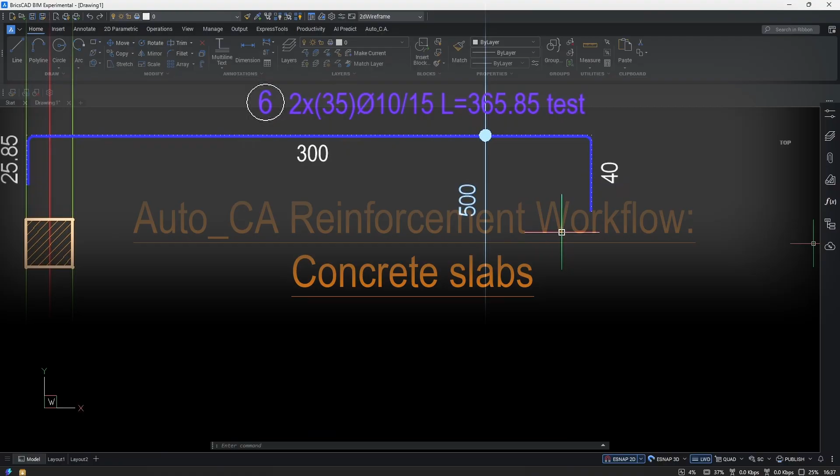Welcome! In this video, we'll provide an overview of AutoCA, our CAD software solution designed to simplify technical drafting and improve productivity. Together, we'll explore the main features of the software and see how it can support your daily design and drafting activities. So, let's get started.

Once the AutoCA installation is complete, activate the software by typing +AutoCA into the CAD command line. After running the command, the AutoCA menu will appear at the top of the CAD interface, as you saw. Open the menu and select Control Panel.

The first time you launch the software, a login window will appear where you'll need to enter your username, password, and activation code. After the initial activation, these credentials are stored automatically, so you won't need to enter them again.

If you prefer not to see the login window in the future, simply disable the corresponding option in the General parameters under the Show Login dialog. Uncheck this box and you're good to go. Don't forget to also click on the Save Environment button. Now, the control panel can be opened using this button. This panel contains the general settings used throughout the software.

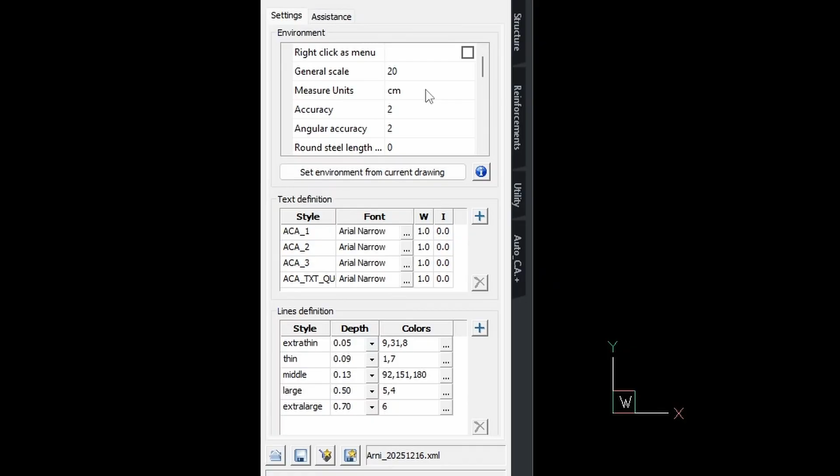The first setting allows you to define the unit of measurement. It's important to select the same unit that is used in the drawing or formwork model you are working with. For example, if your drawing is created in meters, then select meter. If it is created in centimeters, like in my case, you should also select centimeter here, and so on. Maintaining consistency ensures that all reinforcement elements are generated correctly.

Next, we find the font settings grid. These predefined styles cannot be deleted, although additional styles can be created if needed. For that, you just need to click on this plus button that says adding a new style. The default styles, though, will always remain available.

The selected styles are automatically assigned to the various objects created within the software. By modifying a style, all related objects immediately adopt the new graphical standard, including the text appearance, graphics, colors, and other visual properties. This allows you to quickly adapt the entire drawing environment to your company's standards.

The final grid allows you to define the colors used within the drawing. These colors should be configured according to the CTB file used for printing. AutoCA works with 5 predefined line weights, ranging from the thinnest to the thickest pen weight. Each category can be associated with one or more AutoCAD colors.

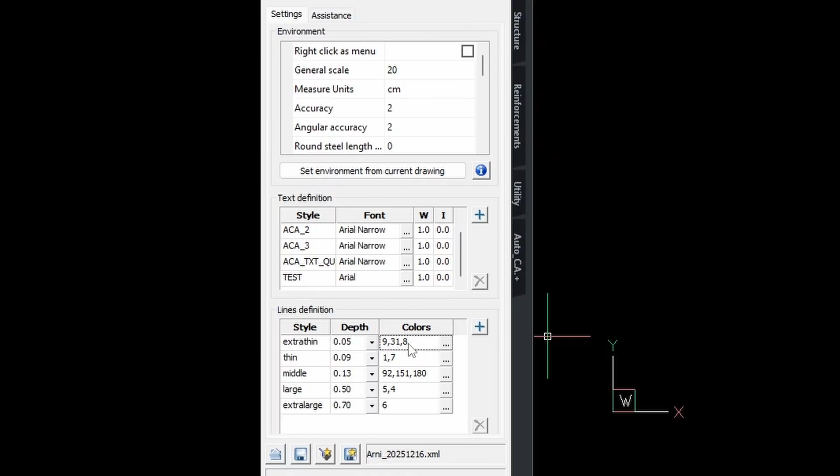Colors can either be entered manually by typing the color number separated by commas, or selected from the standard color picker. For example, if black is assigned to the thinnest pen weight, all colors listed in that category will print as black, but with the corresponding line thickness defined in the CTB file.

One important rule is that the same color cannot be assigned to more than one line weight category. If a color needs to be moved to another category, it must first be removed from its current location. Otherwise, the dialog will not allow the configuration to be saved, since a CTB file can associate a color with only one line weight.

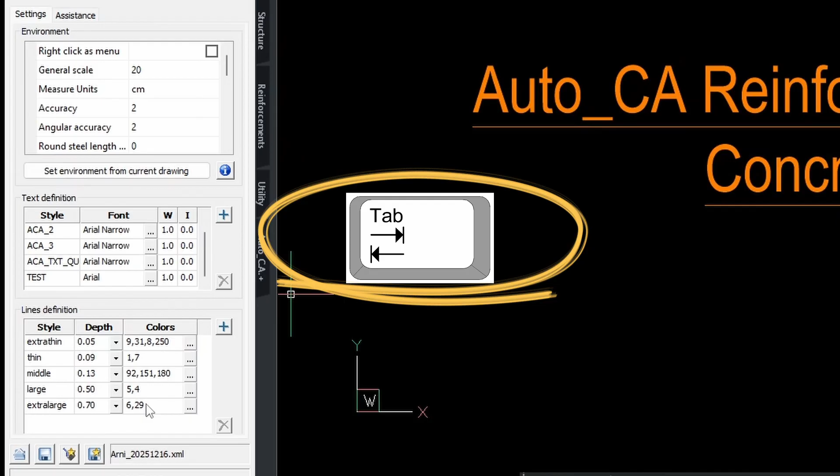Also, when entering values in a field, simply typing the number is not enough. You must confirm the value by pressing the Tab key or clicking into another field. Otherwise, the change will not be registered. This behavior is consistent throughout the software and applies to all AutoCA dialogues.

And now we arrive at one of the most important sections of this panel. At the bottom of the window, we find the controls used to manage working environments. A working environment contains much more than the settings displayed in this dialog. It stores the configuration of all AutoCA dialogues and tools, whether you are creating meshes, bar series, reinforcement bars, or other objects. Each tool contains customization settings that define appearance, colors, layers, and in some cases, calculation parameters.

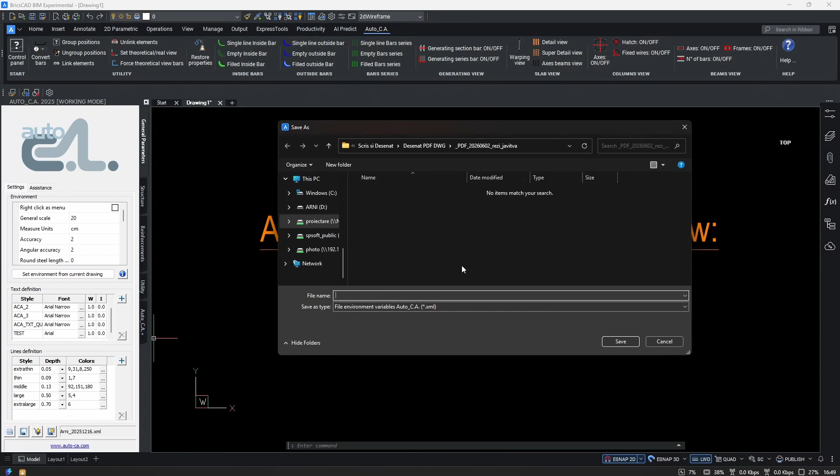All these settings are stored together within a working environment profile. By default, this profile is named AutoCA. We strongly recommend that every user creates a personalized working environment. If modifications are made while using the default AutoCA profile, future software updates may override the file and reset all custom settings. For this reason, it is good practice to immediately create a profile with your own name, your company name, or a project-specific name.

Working environment files can also be shared across a network. This allows you to work with exactly the same standards and settings, ensuring consistency across an entire project team. The Save Environment as Default button stores the current environment in the local computer registry. This ensures that every time the software is launched, the same settings are loaded automatically. If the environment is not saved as default, any changes made during the session will be lost when both AutoCA and the CAD application are closed.

The environment can also be saved to an external file. For example, we can save a profile named test to the desktop. Later, we can reload that file whenever needed and immediately know which configuration is currently active. This provides a simple and reliable way to manage different standards, projects, or client-specific configurations.

Now we're going to look at one of the most common reinforcement workflows in AutoCA: creating, modifying, copying and managing distributed reinforcement bars, and finally generating the corresponding bar schedules and tables. Let's start with something very simple.

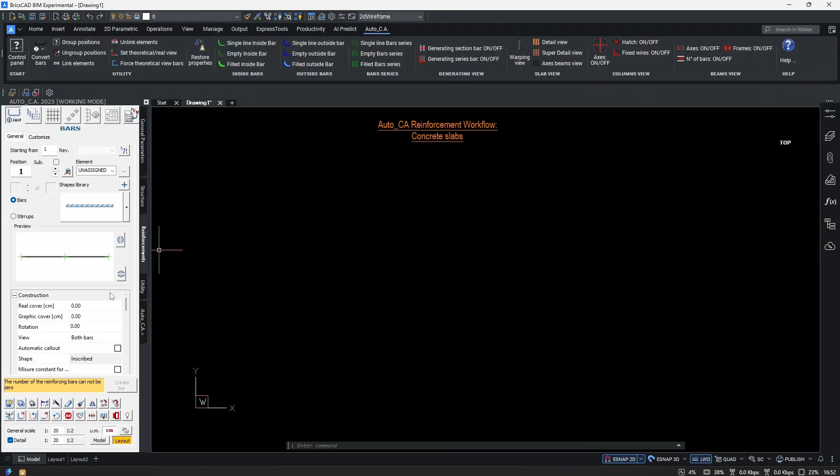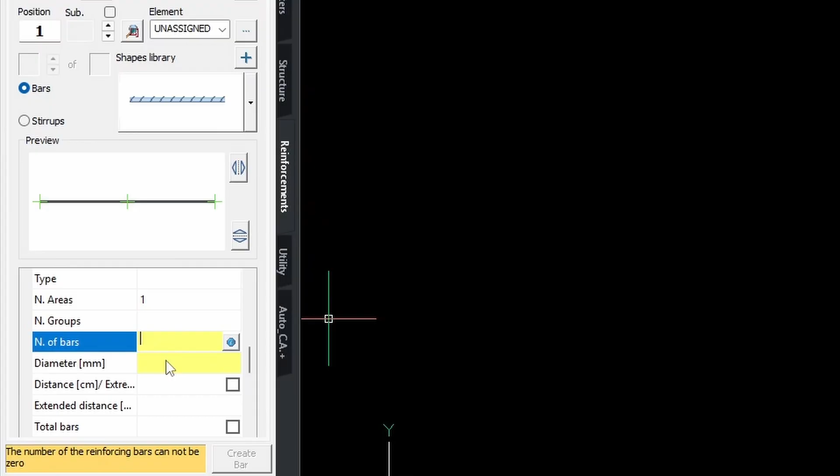First, I'll create a basic reinforcement bar and place it onto the drawing. For that, you will need to specify the length, which initially is 300 centimeters. And also you will have to fill all the other yellow tinted text boxes, because the software won't allow you to create anything unless all the yellow brackets are filled. So number of bars is gonna be 1 for now, and diameter is gonna be 12.

That's in millimeters. Right now, the Create Bar button is live, and I can click on it, and also I can place that bar I just created. One single bar with 12 millimeters in diameter and 300 centimeters in length. Once it's created, I'll make a few copies of it.

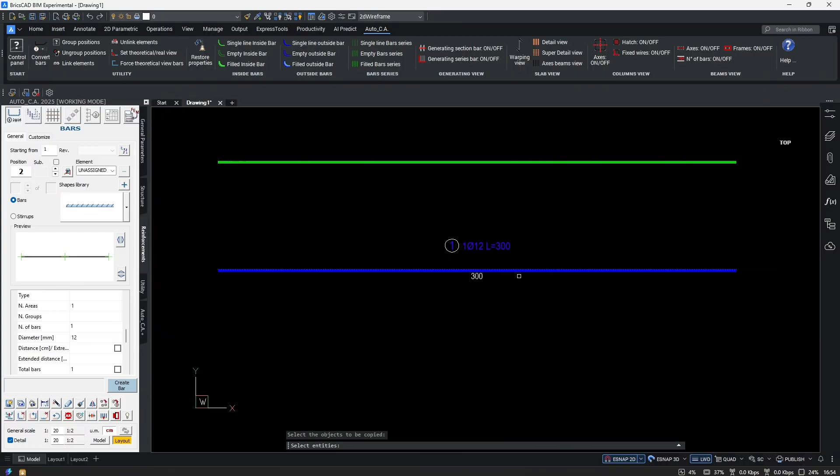For copying Auto C.A. elements, you will need to use the copy elements proprietary command. Keep in mind, this is not the same as the standard CAD copy, so it's proprietary. Notice how the bar numbering continues automatically. Every new bar receives the next available mark number without any manual intervention. 1, 2, 3, 4, 5.

Okay, before moving on, let's also generate a quick bar table using the all bars in drawing option so we can see how the software is already tracking our reinforcement information. As you can see, here we have all 5 bars.

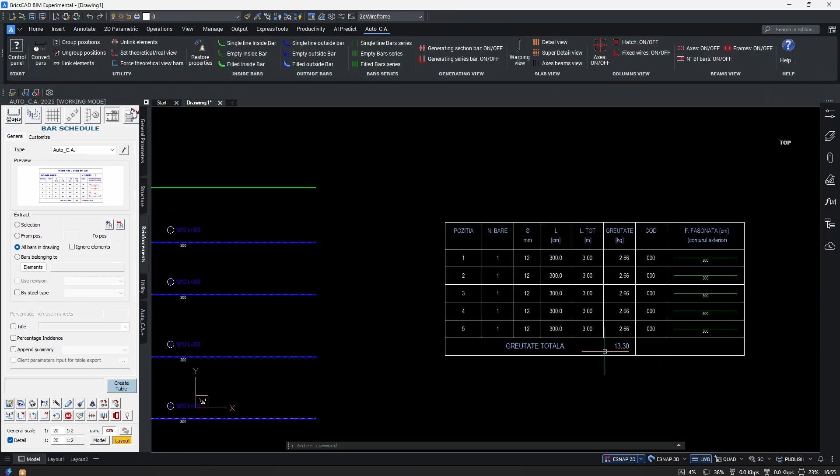Now, let's switch to a clean formwork drawing and start a more realistic example. We'll create a simple distributed reinforcement bar arrangement from scratch. And now, as we go through the definition process, I'll explain every option available in the dialog. So, as we talked about earlier, we need to fill all the yellow text boxes to be able to create anything. So, I will enter as a number of bars a 1 and for diameter a 10.

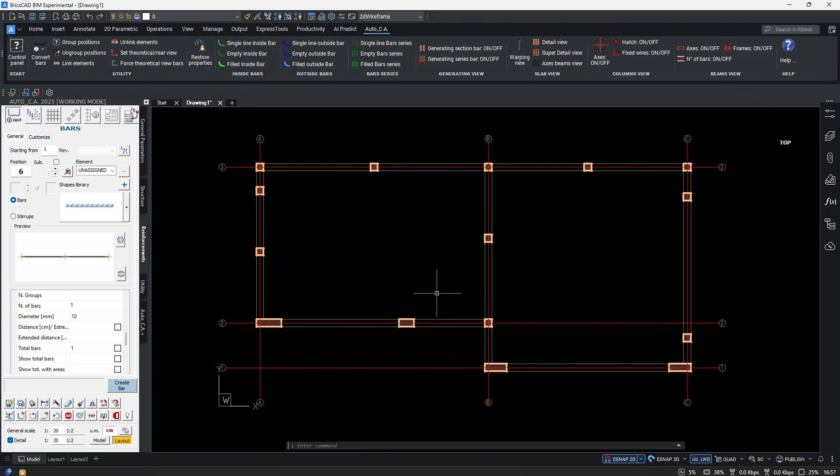But right now I want to distribute these bars along this slab, so we will need to also insert a distance between every bar and an extended distance, which will be the full distribution distance. For that, I will use this button, which is the graphic extension. I will define this length, which is 5 meters, and this is exactly what's entered here in the text box.

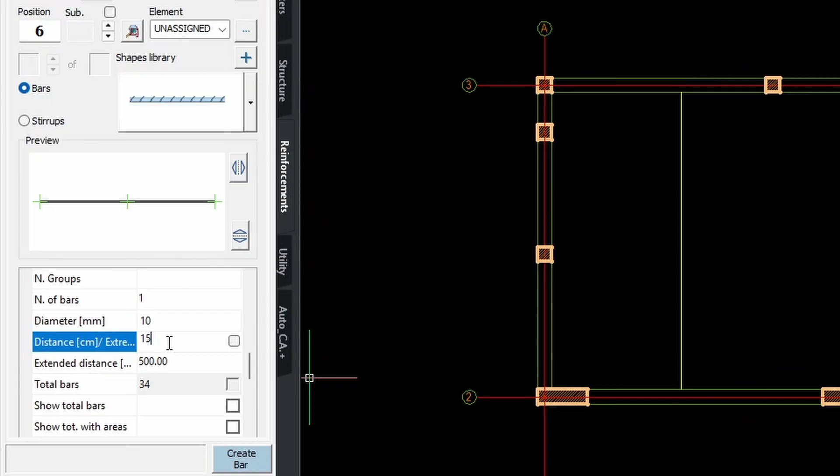And together with the 15 centimeter distribution distance, it's already calculated that we have 34 bars. Okay, let's put this bar onto the drawing. I want only the outside bar, and let's put it over here.

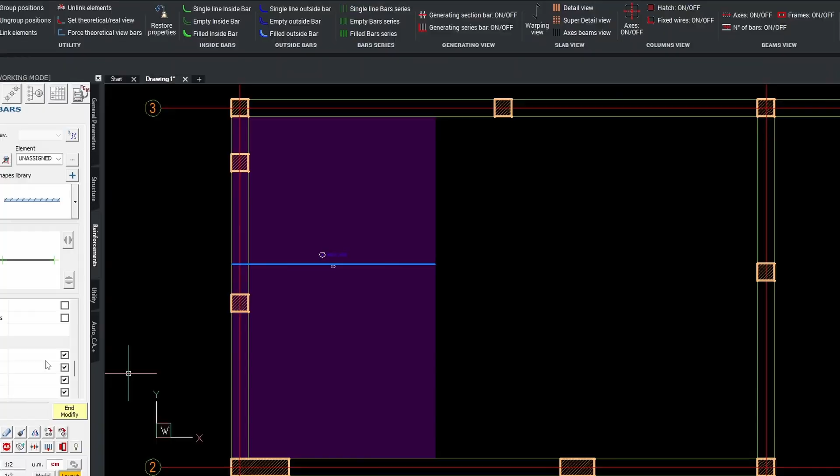One thing worth mentioning is that in practice, most users rarely create complete bar definitions from scratch. Once you understand the logic, you might only perform a full definition a handful of times. After that, most reinforcement is created simply by copying and adapting existing bars.

So we need the graphic extension shown, and right now we have the little blue arrow representing the distribution distance, the full distance. Now there are some other features that you might need to know of. Let's go into the bar properties, modify bar, and at the distance between the bars, we have another checkbox. And if you hover your mouse over here, it shows extremes required.

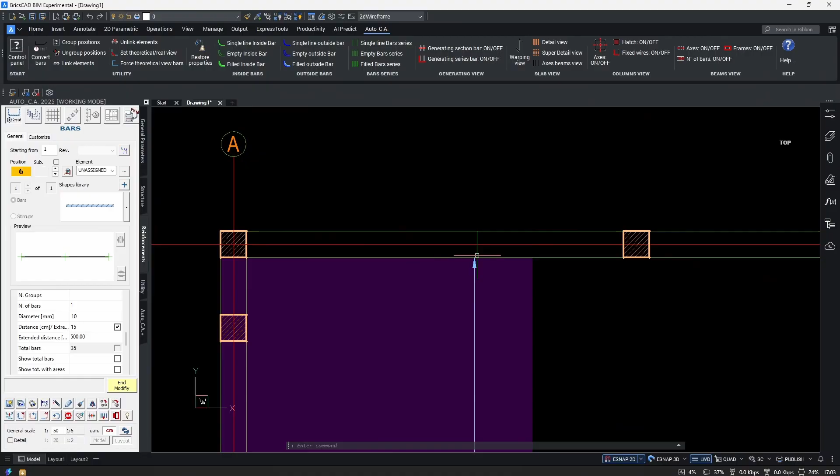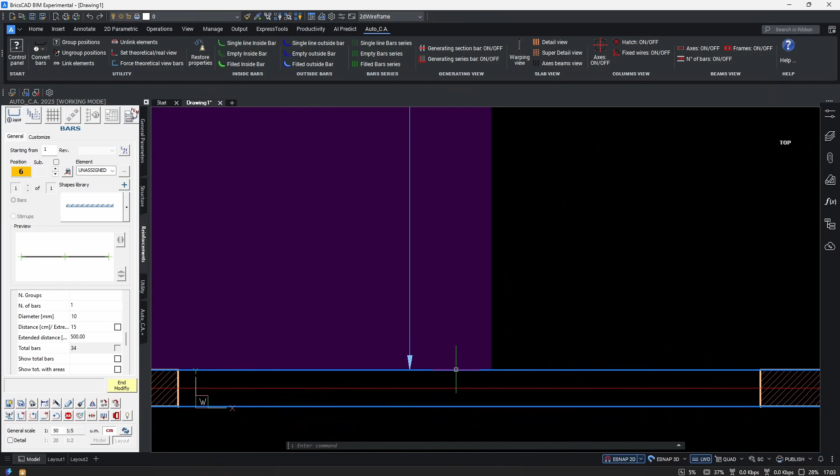These extremes mean that if you check this box, then you will have another bar in plus, because the distribution will start and end with 1 bar. And if you uncheck this, the last bar will disappear in theory, because we are not forcing the distribution to have a bar on both ends. So if you want to force it, you can, and you will have a bar in plus. But if you don't need that, you just uncheck this box.

And after that, we have several other checkboxes down under the visualization menu, and let's walk through them. The real view means that you will have the exact thickness as it is mentioned in the text here. So what you define in the diameter, that exact thickness you will get if you check this real view. If not, you will only get a simple line.

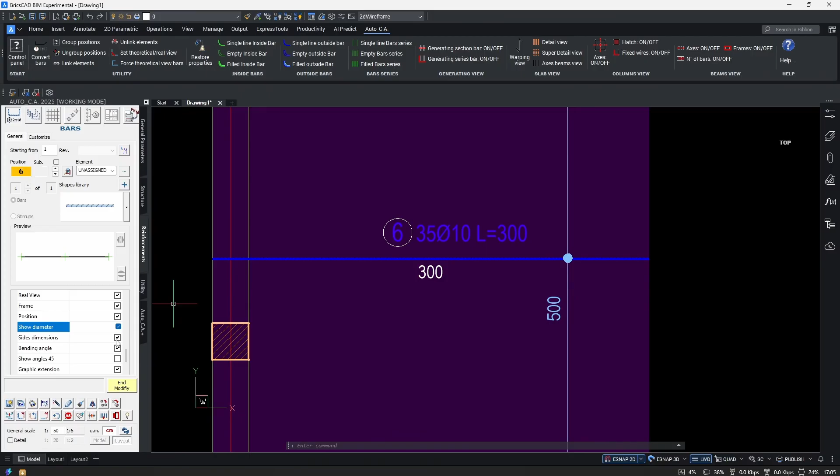The frame is the frame around the mark number. You can enable and disable that. The position is the full mark, hidden or shown. The show diameter is the diameter parameter in the label of the bar. Sides dimension, this is the smaller number indicating all the sides.

Bending angle, we also have that one. If we had another side, we could see that. Let me fix that. As you can see, now I have multiple sides, and also we can have a bending angle. Here is the bending angle. So you can show or hide it. Show angles 45. It means if you want to see even the 90 and the 45 degrees or not. Right now we don't see them.

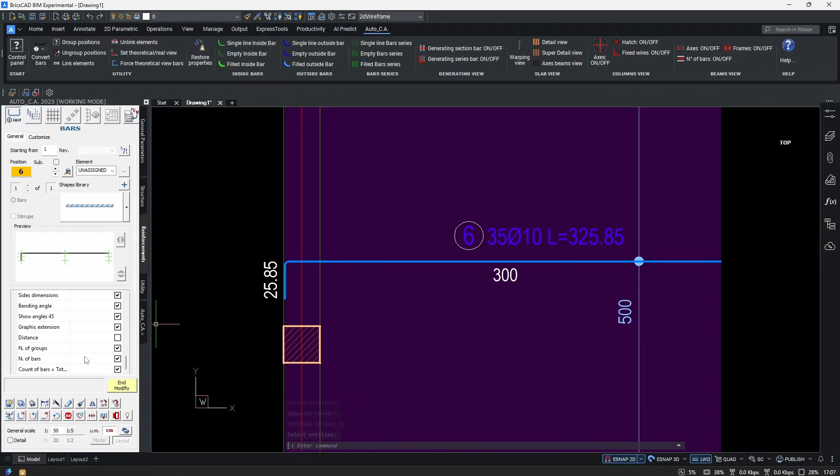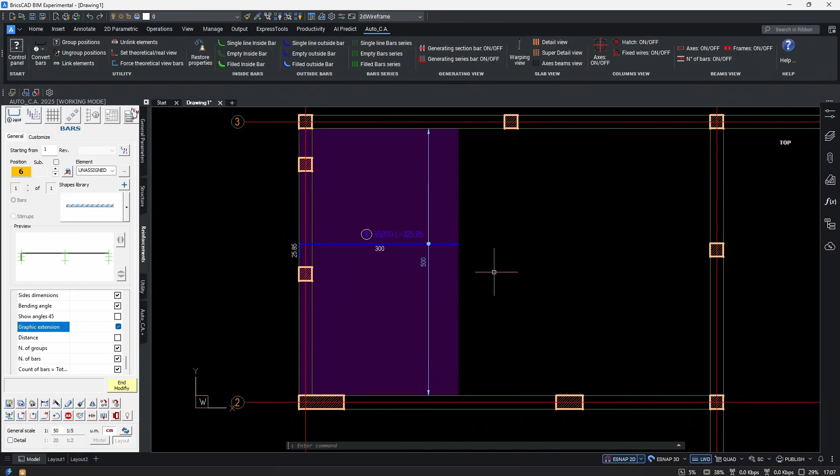So there's an option to see every single angle if you want, and there's also the option to only see the odd numbers in the angles. The graphic extension is this arrow indicating the full length where this single bar is distributed. We have the distance, which is the distribution distance between individual bars.

The number of groups, that's toggleable also. And for that, you need to specify a group number. And as you can see, the label starts now with the multiplication with the group number. So we have that also. We have distance, we have number of bars and the different types of them. We can have also the count of total bars, and also length, which is easy to understand.

Radius, if we had circular bars, a type. This is where you can enter the type. You can create a new category like B500C. That's what we use in Europe. Add that, and we have the type, and that is toggleable also. Steel type is the main type. The simple type category may be a subcategory if you want to add that.

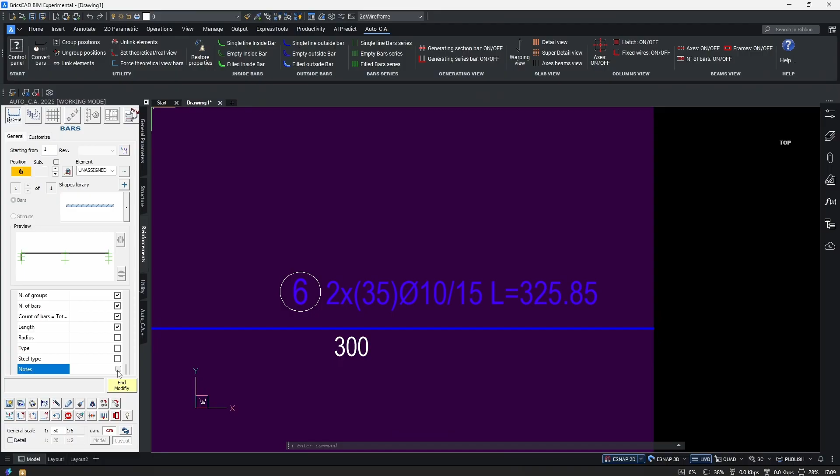And lastly, we have notes if you want to add something like a mention, and now we can write that. So these are the different options inside the bar modification panel. Keep in mind that none of these settings are permanent, so anytime you feel so, you can go back to the modification panel and change all these settings we just went through.

You can do this either by selecting the bar and accessing the right-click context menu and click on Modify Bar, or we have a dedicated button for that, which has a pencil on its icon. You can click on it and select your bar, or bars even, which you want to edit.

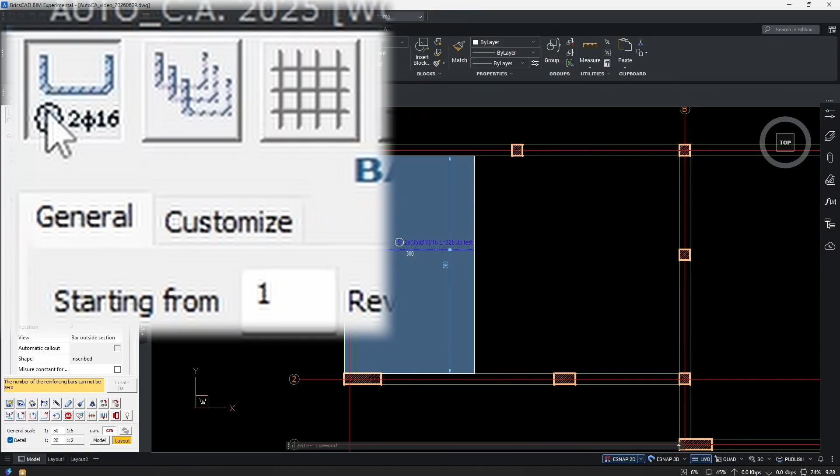Okay, after placing the first distribution, the hatch and the boundary should automatically appear. If the display is not exactly what you want, don't worry. This is something that can be configured once in the Customize tab. Just make sure that you're in the bars menu. Click on Customize and search for Graphic Application field. And under that, you can find a boundary and the hatch checkbox, which you can disable.

Apply the properties either to all the bars inside this drawing, or just selecting one. Right now I'm gonna select my bar, press space, and now the application field, so the boundary and the hatch, are both disabled. After that, you typically won't need to adjust it again, but you have the decision to have these graphical aids or not. Also, you can change the boundary color, and the same is true for the hatch itself.

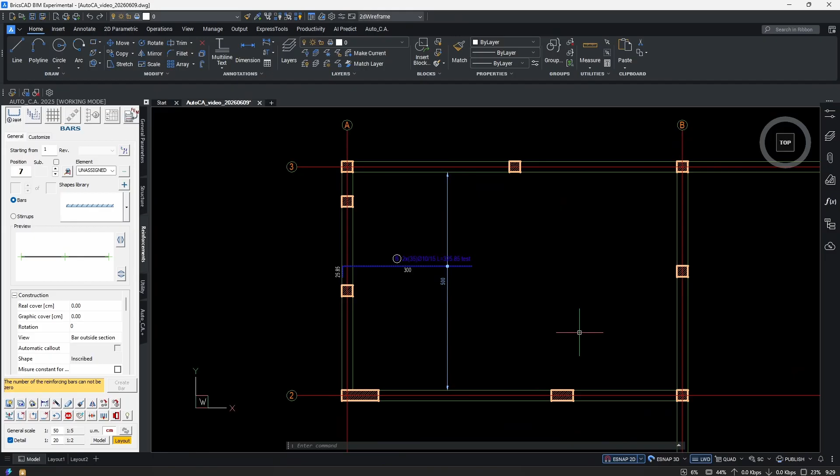Okay, let's go back to general. And now let's talk about editing. Suppose the shape we created is not exactly what we wanted. That's perfectly fine, because any reinforcement bar can be modified at any time. We can edit its geometry, remove hooks, remove sides, add new hooks, completely change the shape, or make other adjustments. For demonstration purposes, I'll add a new side to this bar.

Let's say I want another side that's 40 centimeters long. I press space and here we have our new side. But for the sake of this example, I will exaggerate it a little bit so you understand that you can do anything you want with this bar. 25, 120, it doesn't matter because you can do any shape with Auto_C.A.

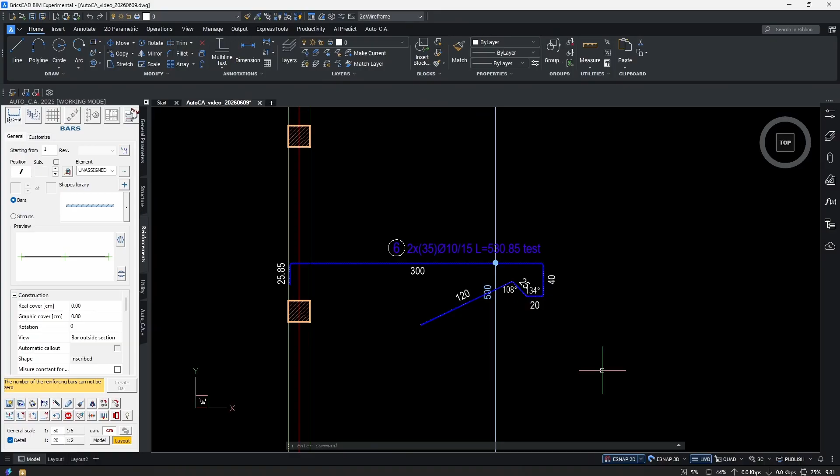Okay, so yeah, we know that it's a little bit exaggerated. We don't use anything like that in the real world, but there's the possibility to make interesting things. So I hope with this example you get the point that it's very easy to use. Now let's remove unwanted sides like these ones. Okay, I use the remove side button for that. The hook does almost the same, only with 2 sides, so you get a complete 180 turn with the hook, and I can delete the hook.

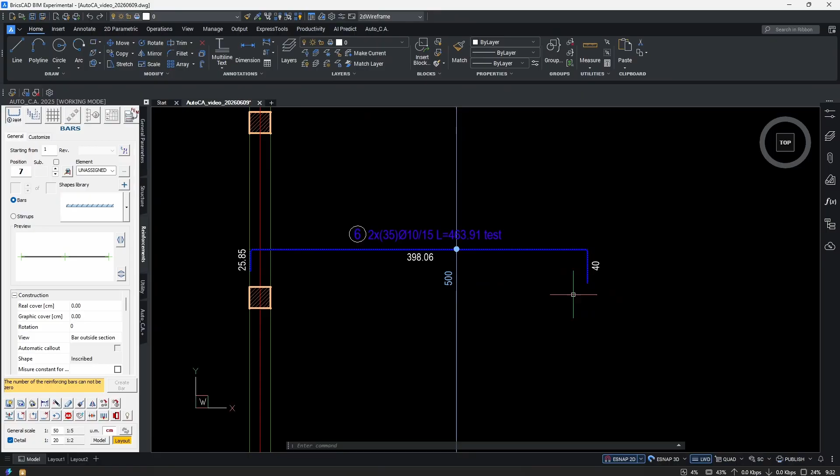What is important to understand is that this reinforcement object is actually a package of linked elements. If we modify the bar itself, like stretching it, the arrows, labels, quantities, lengths, and other associated information update automatically. Like if I change the length of this arrow, you can keep your eyes on the number here. We immediately get less bars because the distribution distance got a lot smaller. So this is the whole package.

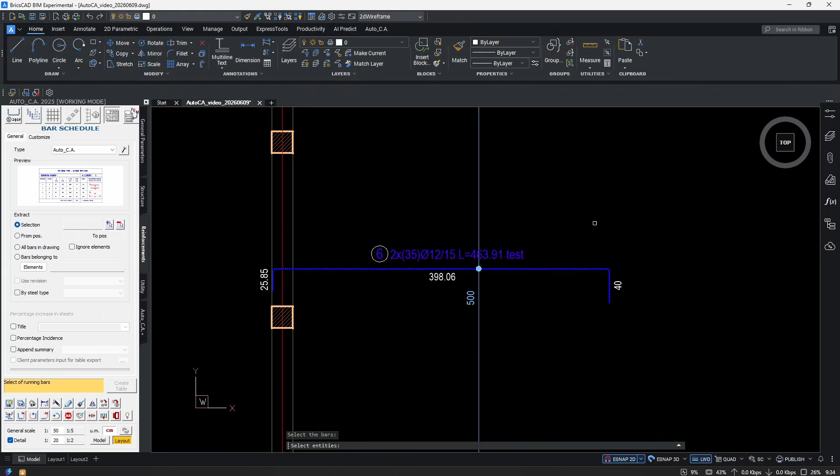Likewise, if we modify the annotation components, the reinforcement data remains synchronized. Like if I want 12 millimeters in diameter, I can do that just by editing this text. Click away, and now we have a 12 diameter bar. You can even check that with a quick bar list. Right here we have 12 in the diameter section.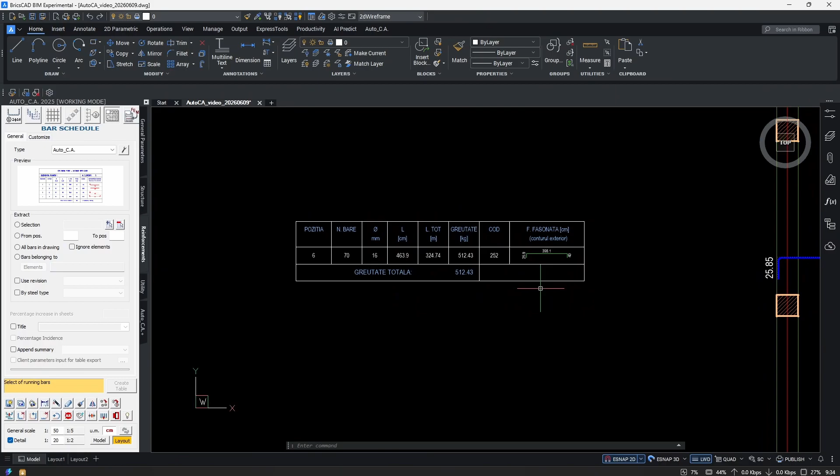If I want bigger, I just edit this text. I say 16, click away, space, and now everything, the diameter, the weight, and everything gets updated. By the way, let me put this in English, and now you can understand the list better. Let's assume that we need another similar reinforcement bar elsewhere.

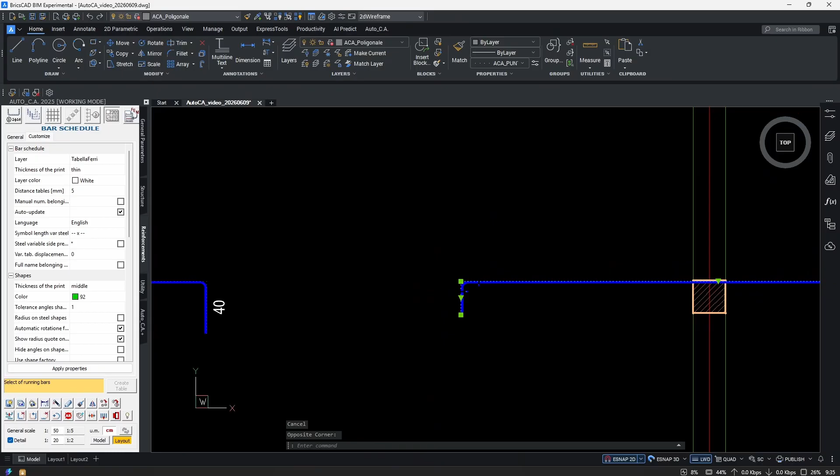Instead of creating a completely new definition, we simply copy the existing one. This is usually the fastest and the most efficient way of doing that. So let's use the AutoCA copy. It's very important that you do not, under any circumstance, use the standard AutoCAD or BricsCAD copy, because if you do that, you just copy simple elements like hatches and lines. But this is not an AutoCA entity anymore.

So keep in mind that you always use copy elements here in the AutoCA control panel to make multiple AutoCA elements. See? Now they are AutoCA components because they got a new number. The first one was 6, this is 7, this is 8. So it's all updated. So as I said, the AutoCA copy and mirror functions work somewhat differently from the standard CAD commands.

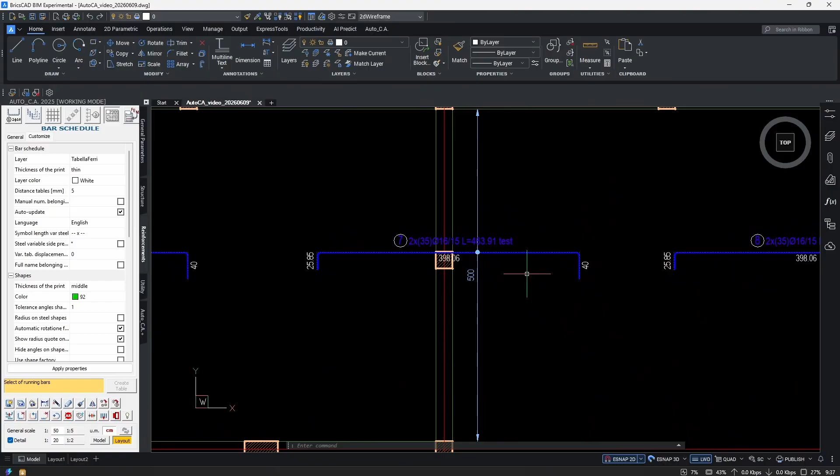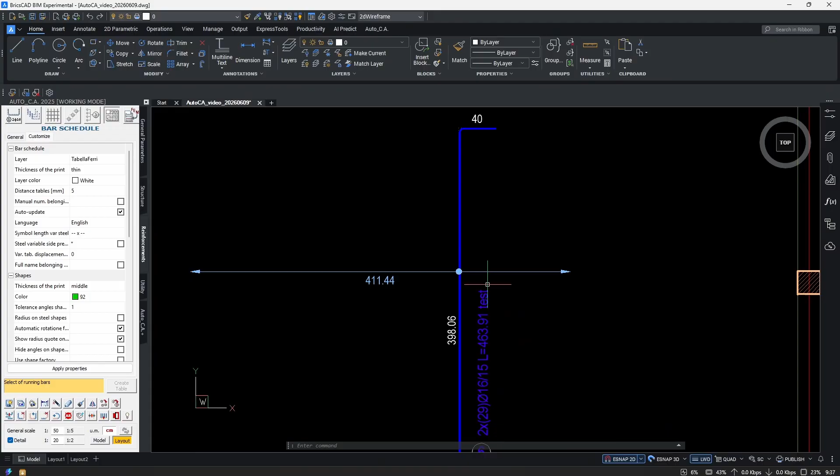However, the move and rotate behave exactly the same as you would expect from traditional CAD tools. So that's just a simple move command, and I can move these bars around. And likewise with the rotate button. The only thing with rotate is you might need to update it by moving the bar or by modifying it, because sometimes the graphic gets messy, but after an update, as you saw earlier, everything goes back to its place. Let's tidy up a little bit here.

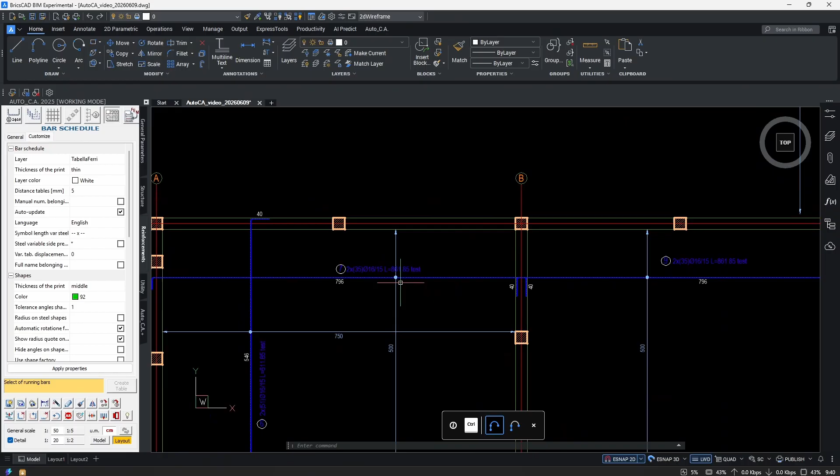Let me show you the mirror command. So this is another proprietary command for the AutoCA because it's also copy, but with a mirror integrated into it. So if I select this line as the mirror plane, I can choose whether to delete the source element or not. So if I say don't delete it, which is the default, then I immediately make a copy of the source bar. And that's why you need to use for the mirror command this proprietary mirror elements command from the AutoCA control panel.

Okay, a quick side note. If you need to copy reinforcement from one drawing to another, AutoCA provides dedicated copy and paste commands specifically designed for reinforcement objects. So it's somewhat similar to the in-drawing copy command, but it's between drawings. So you have to use the copy auto_ca command if you want to transfer these elements. First you select them, press space or enter, and select a reference point, basically a grabbing point from where you grab these elements.

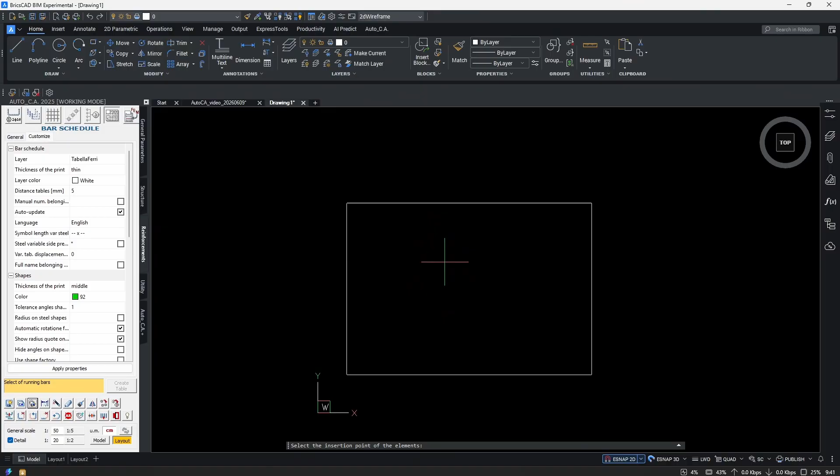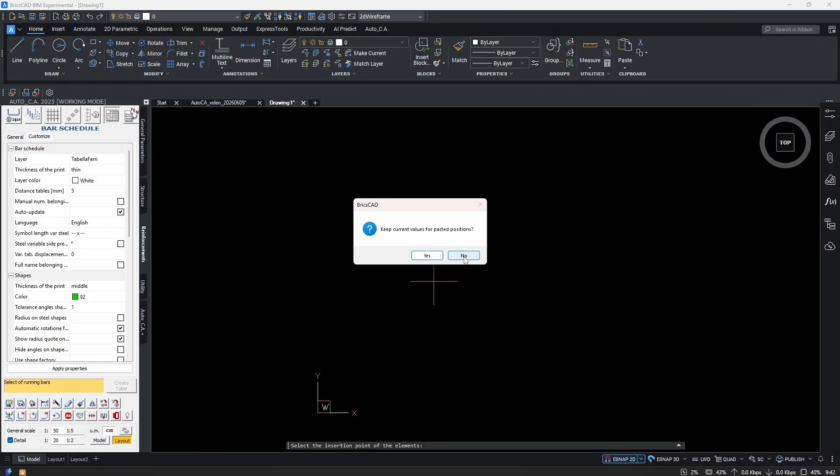And going to the other drawing, we have the paste AutoCA command, and now we have a marker, a box with the grabbing point we specified, and we can paste our bars in the new drawing. BricsCAD asks if we want to keep the current values for pasted positions. If you say yes, you will get the same mark numbers as from the source drawing, or if you say no, a new numbering will start with 1. As you can see, 1 and 2, but what we copied were 6 and 7. So that's how you transfer bars from drawing to drawing.

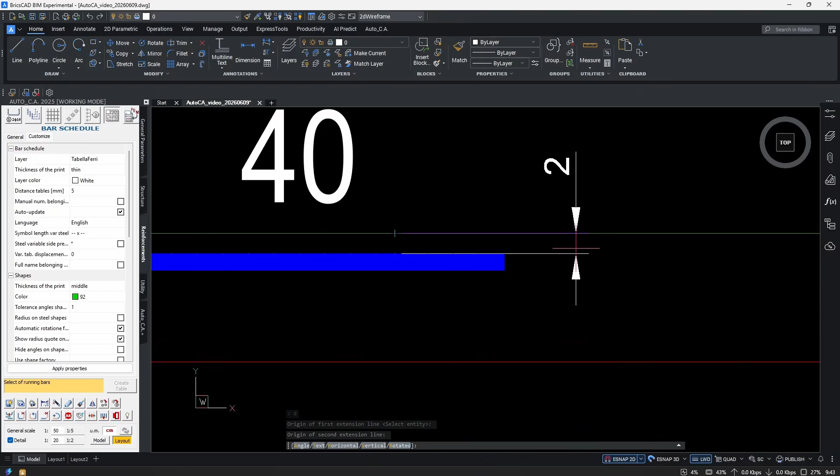Now I'll create several additional reinforcement positions. The easiest method is usually to use reference points from the formwork drawing. So as I see, I have a 2 centimeter cover here for the reinforcement, and I select the formwork as reference point. So when I paste my new bar in its new place, the exact same cover distance will be kept. And this is the easiest method for copying bars. Let's stretch it into place.

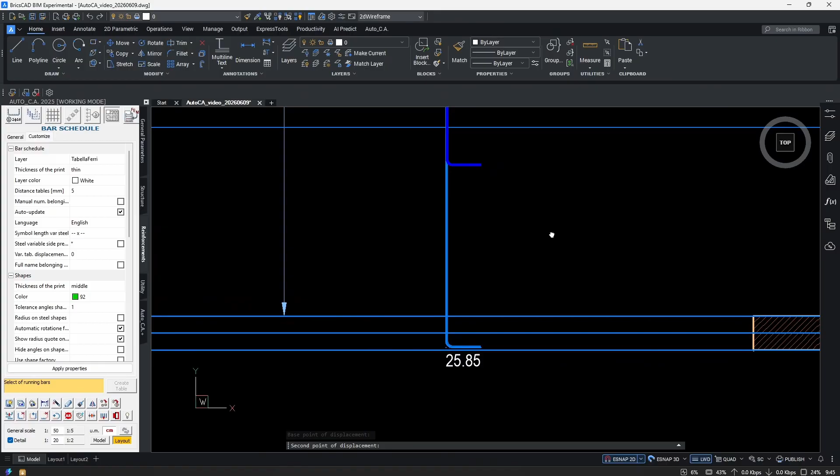And a quick side note for the stretch command: if you are not familiar with this very useful command, you can just type S in the command line, which brings up the stretch command, press space, and now you will be able to specify a rectangle in which you can include all the vertices of a polygon or polyline that you want to move elsewhere. So if I want to shorten this bar, I just need to include this end in the marker. So when I select it and press space, I can grab a reference point and bring the two ends closer to each other.

So keep in mind that you don't stretch like this, because you can do nothing when you did not select any vertices. So these are the points you need to grab with the lasso and bring anywhere else. So that was just a few words on the stretch command. You need to get familiarized with this one because you will use it a lot when you work with AutoCA. Okay, let's make some more reinforcements.

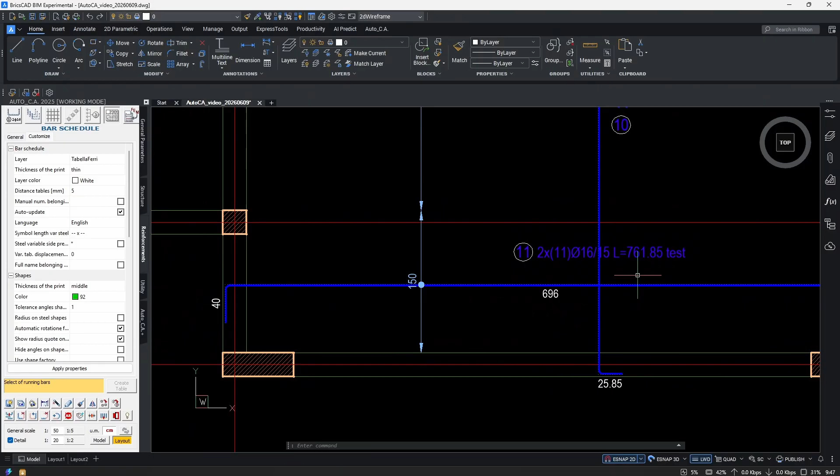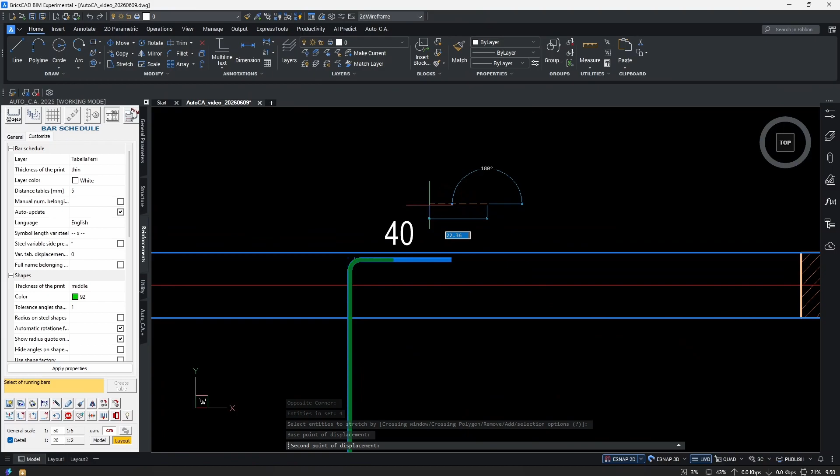I'll intentionally keep at least 2 reinforcement positions identical in size. That's 696, 696. The total length is the same, and also the diameter and everything else. And as for the others, I already showed you how to stretch them and how to change their parameters. For the example, I'm gonna do the same again. Let's make these sides a little bit smaller, like 22. Now it's 18. And also you can edit all the sides text box so it gets stretched to the dimension I wanted.

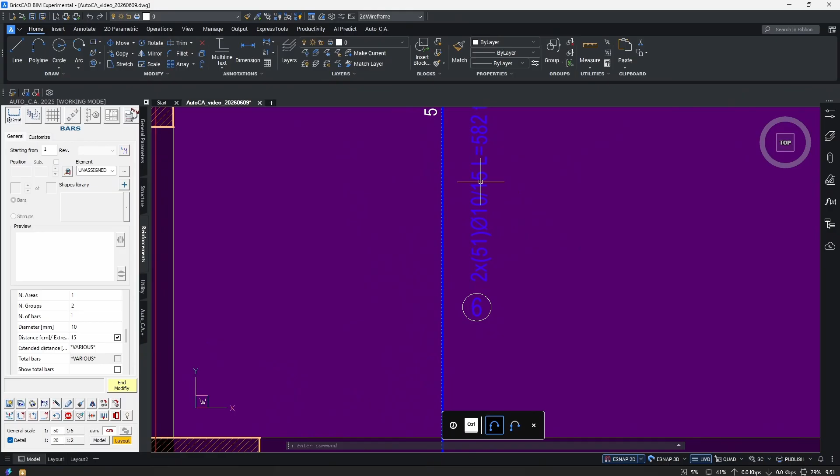I will do the same here also, and let's edit both bars through the modify bar panel. You will get an element filter where you can indicate what you want to modify. Now we have a purple indicator indicating the area where these two bars are distributed. Let's change their diameter back to 10, and now they both get updated with the correct parameter.

Let's change this side too. I want to move this one. Okay. As you can see, everything I do with them automatically gets refreshed. So here's where you can save a lot of time when you don't have to go through every single bar to update its information. You just stretch them, move them, edit them, and everything updates automatically.

Now that we understand the basic rules of bar modification, let's convert this drawing into a real meaningful slab reinforcement drawing. For that, we will need to use these elements, which are the upper bars, and we will also use simple bars with no additional sides. So I'm gonna copy with the copy element command, and I'm gonna delete these two sides. So we have the lower bar and the upper bar in this position.

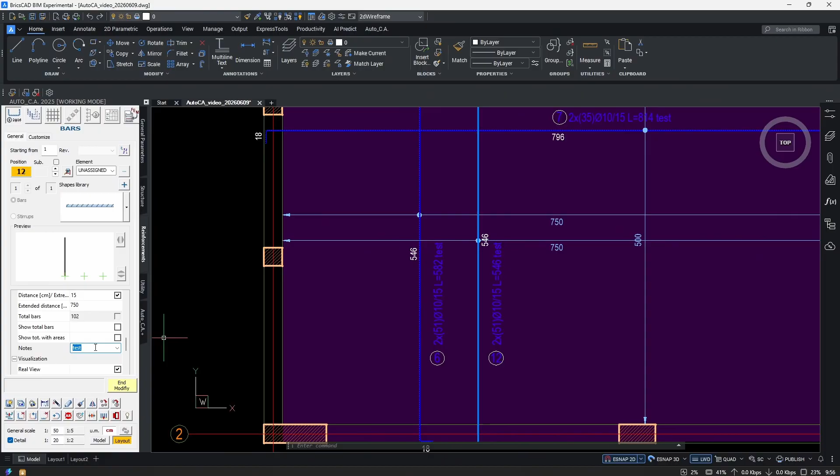Let's not forget to place these arrows correctly. You can also leave a note on the bars, as we saw earlier. Here in the notes bracket, you can write that this is the lower one. You just need to hit enter, and now we know that this is the lower reinforcement bar, or the inferior one, and this one will be the upper bar, or the superior one.

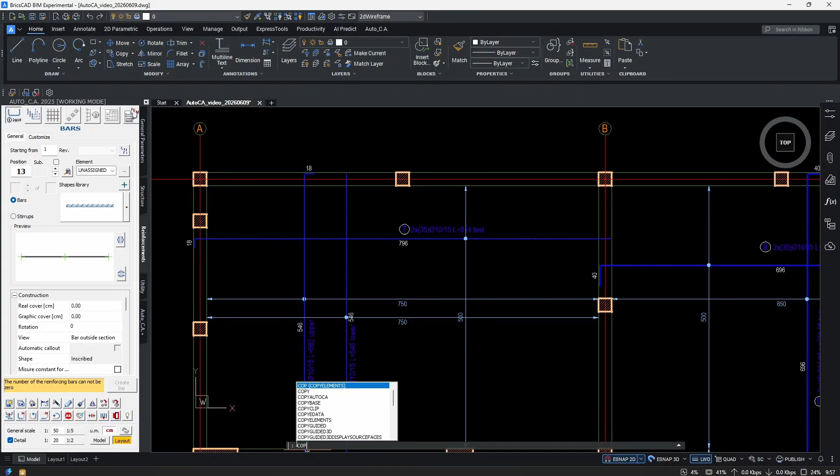Okay, so we have this direction. We can do the same to this one. Copy elements. I just have the shortcut COP to make my life easier. Okay, delete side. That side's already deleted. Place the arrow, and all the information is already updated. Let's add the side to here, and let's stretch it all the way to here with a cover.

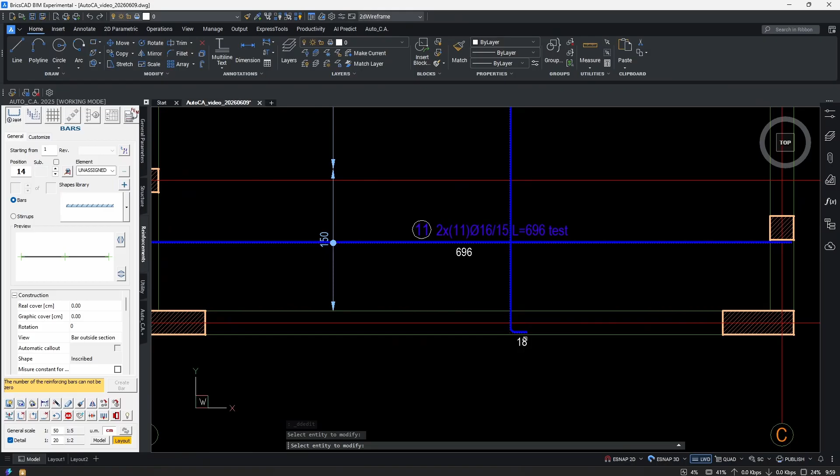Obviously, we can delete these bars' sides, so we have a continuous distribution on the lower side, and we will do the same to this one, so these two stay the same. And the last thing, this position, let's edit these sides. Let's copy this one, and let's delete its sides.

Okay, so now one last thing remains, and that's to copy this one and place it over here with this shape, because this long upper bar is distributed only to this point, and we need something on the upper side on this area as well. So that's how we resolve this problem. Okay, that's that. So we have everything arranged. So now what we did was we copied a lot of bars and changed their shapes, but we left two bars being identical because it will be important later.

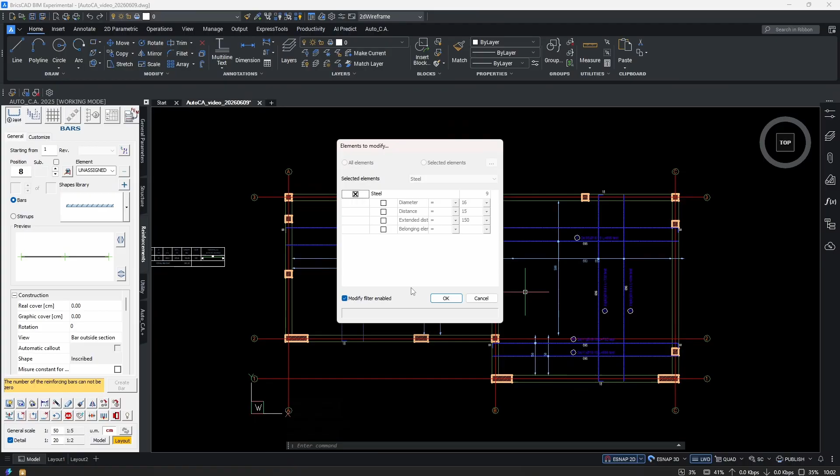Now let's look at mass modification. Suppose we decide that all these bars should have a different spacing or a different diameter. Instead of editing them one by one, we can update all similar bars simultaneously, as we saw earlier with these two bars. But now we will do it on a bigger scale. So I'm gonna start the MD command, the modify command, press space, select everything, including lines, polylines, hatches, it doesn't matter. The command knows what to select exactly, and also you will get this filter, so you can narrow your search down.

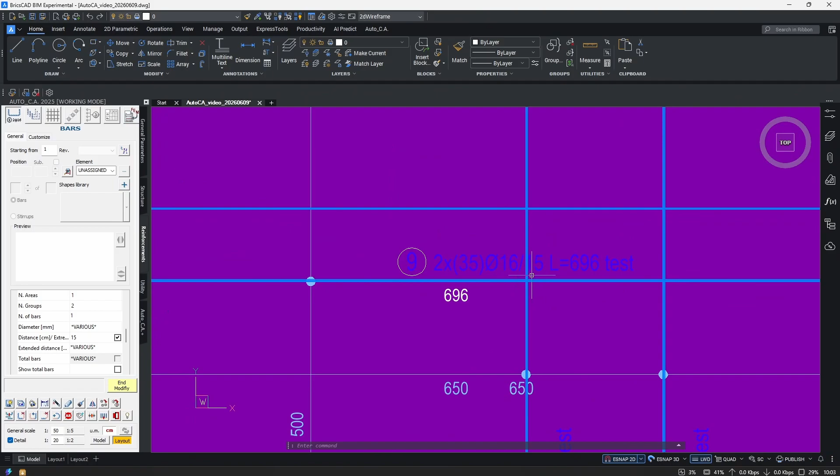Now let's say that we want to increase the diameter of our bars, so we have various written here in the diameter bracket. That's because we have 10s and 16s in our drawing. So if we want to fix that, we can just simply write 12 into the text box, click away or press tab, and now you can check that each of our bars got up to the 12 millimeter diameter. So that's how you can mass update your bars.

You really don't have to meticulously go through every detail, because if you feel like you are struggling with the software, that's probably because you are doing something wrong. The workflow should be seamless, without struggle. There's a possibility that you don't know of a feature. That's maybe why you're struggling. This software was created with a mindset to make life easier. It's not supposed to make your life harder. No. Exactly the opposite.

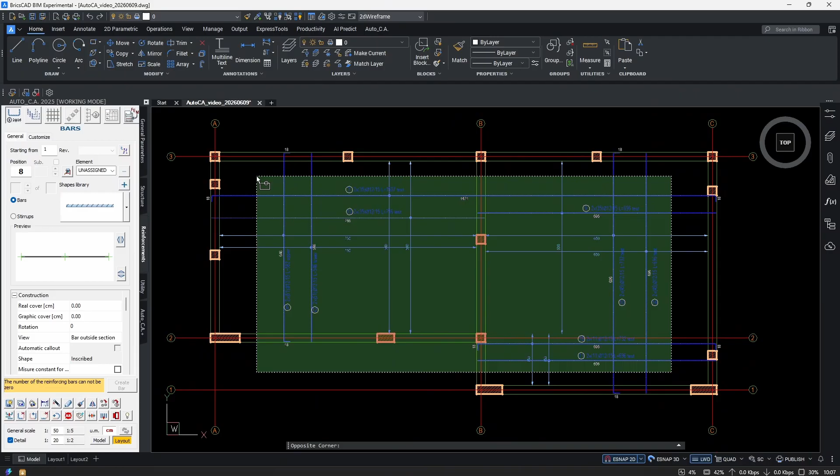So, parenthesis closed. Let's move on. We saw the mass modification. We can achieve the same result if we select everything and just click on the right click context menu, the modify bar, and this is the same modification panel. So you have options here. Once everything is ready, let's generate a bar schedule. You can also update this one and include the new bars into the same list, but let's try creating another one.

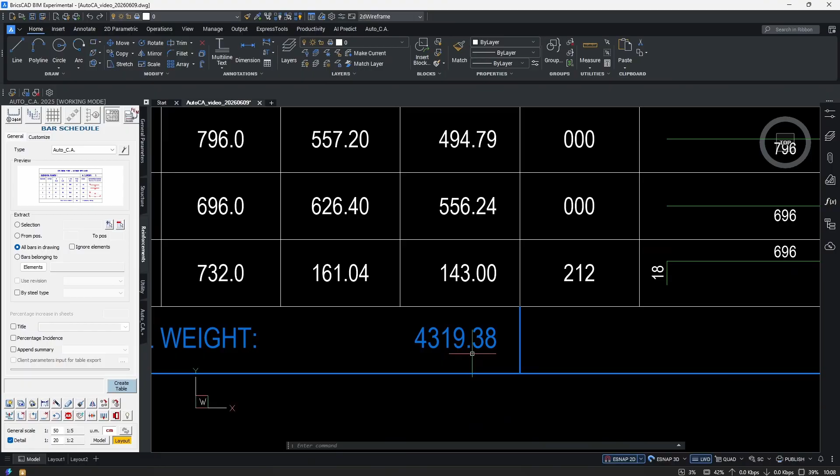All bars in drawing, create table. Here we have from number 1 all the way to number 15, all the bars included inside the same bar schedule. We have a total weight of a little bit more than 4 tons, and we can see all the shapes of our bars in miniature.

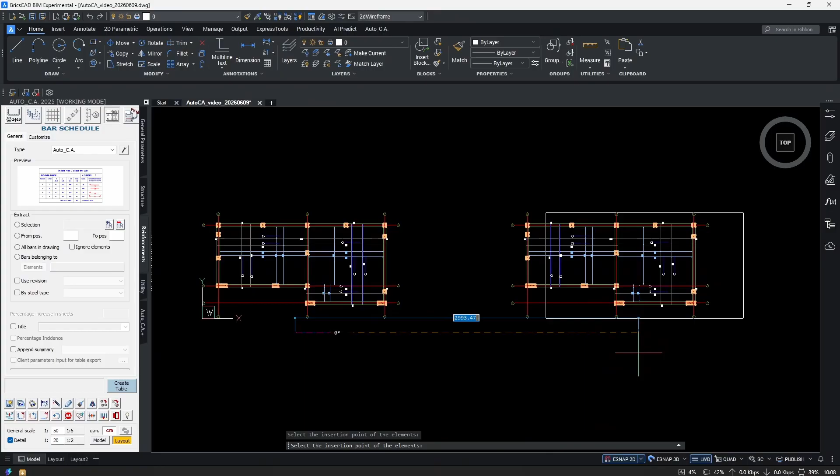So what I'm going to do next is copy the entire slab and create a second one. For that, I'll also use the copy elements command. I'll select everything, all lines and hatches included, because now we're not just copying the bars, but all the formwork too.

So here we have another concrete slab formwork with its reinforcements. We will generate a separate bar list for the new slab, and then create another one that includes the reinforcements from both slabs. Now we have twice the amount of reinforcements.

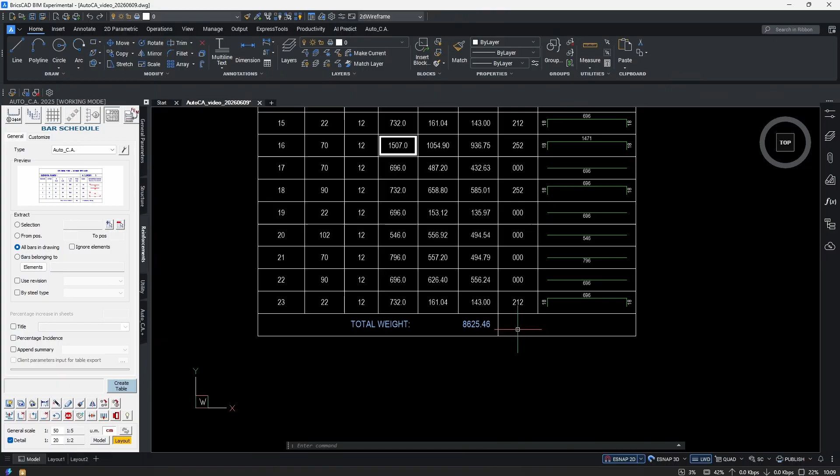Now, at this stage, let's discuss numbering. Using the renumber function, renumber CA, I can reorganize the reinforcement marks. And remember, mark number 1 can only exist once within a drawing. So you won't have two different shapes of bars with different parameters having the same mark number. That's impossible. If you see identical numbers, that means those are identical bars as well.

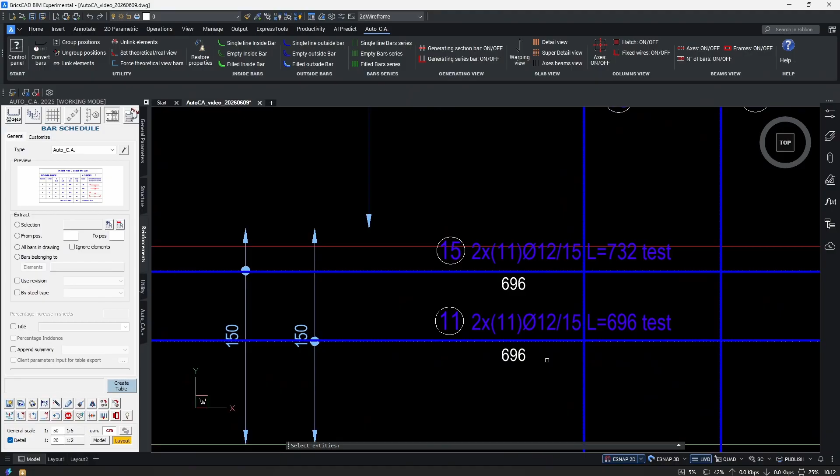So in our example, for the second slab, I renumber the reinforcements starting from mark 100. For that, I select everything, and here we have another yellow text box, which means we are obligated to fill it. This is where I write 100, because that's the mark from where I want to renumber our bars. I press the renumber button, and now we have 9 elements, with the first position at mark 100 and the last position at mark 108.

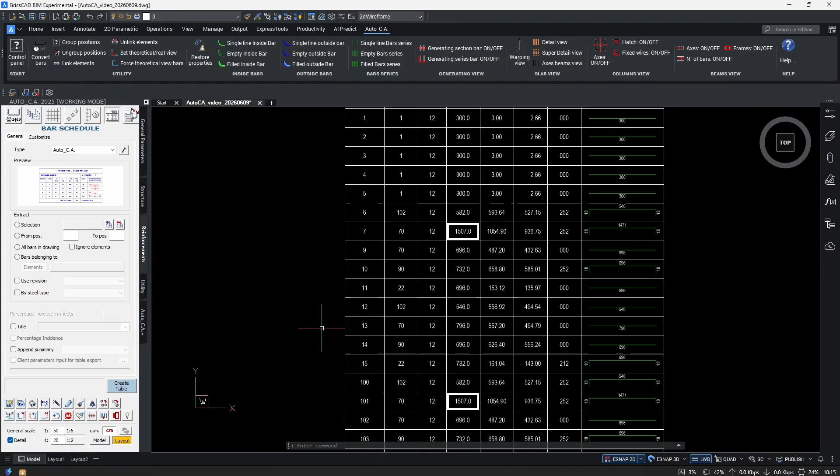Now we can close it and check the result even on the bar list. Here we have 9 bars from 100 to 108. And if we examine the big table, we'll notice something interesting: some reinforcement marks have different numbers but are actually identical in diameter, shape, and length.

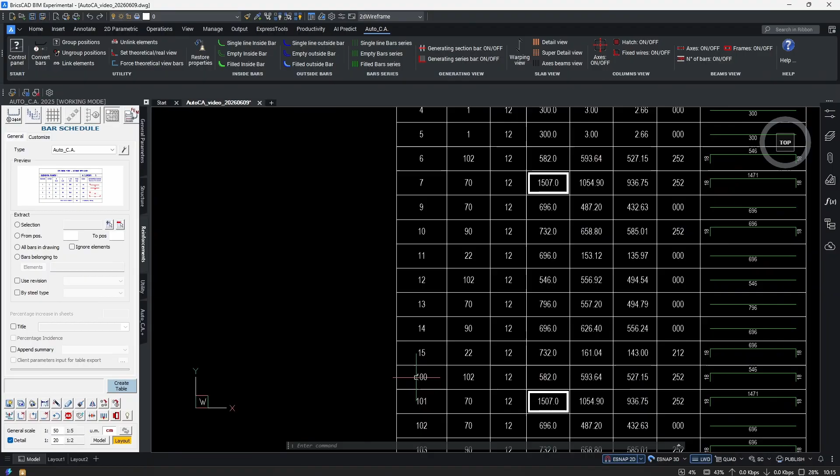Like, for example, the 6 and number 100. These are both 12 in diameter, 582 in length, total length 593. So these are basically identical bars, but have different mark numbers.

And this is where grouping positions becomes useful. I'll run the group positions operation. Then I'll need to select individual bars, or just select everything, all bars. I will select all bars. I'll need to decide which position number to use for identical ones.

If we check this box, the program will automatically use the lowest value. So click OK, and now let's update all the bar lists. Right click, bar schedule, and update. You can notice that this previously much bigger list got a lot smaller. That's because we have grouped elements now.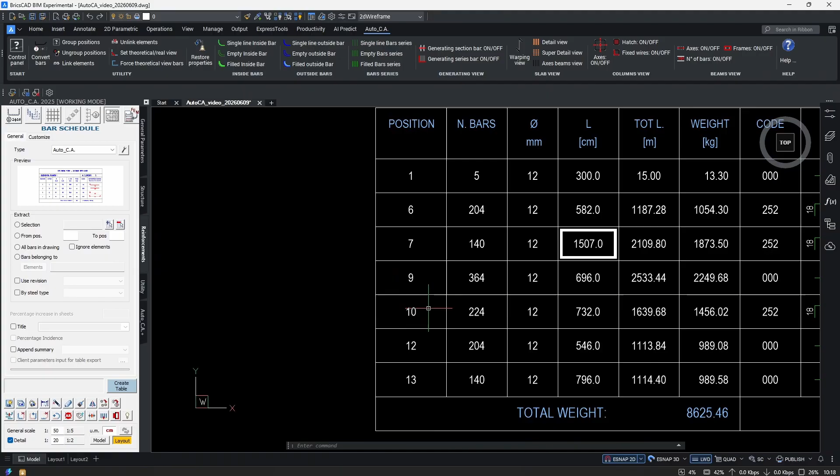So we have a number 6 here, and number 6 here also. As I said earlier, if you see identical numbers, that must mean without exception that these two bars are identical. You can also notice that some mark numbers disappeared, like 8 or 5, and the numbering sequence is no longer continuous. This is completely normal, since we selected that the program should use the lowest value when grouping elements together.

So, to restore a clean numbering sequence, we simply run renumber again, like so. Renumber CA, space, select everything, space again, and let's renumber them starting from 100. Now we have 18 elements, but because of the grouping, we have the maximum position number at only 105. Close that, and now we have a clear numbering sequence.

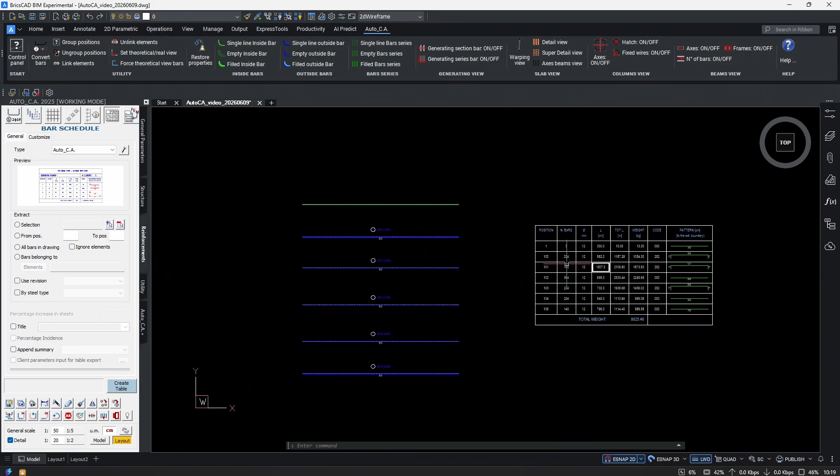This number 1 bar must come from here. As you can see, we selected to group everything together, so we can get back to the selection only and select only those bars we want to see. It seems you cannot change the type of the table afterward, but you can always create another bar list only with the selected elements. So this is all bars in drawing, and this is only the slabs we created.

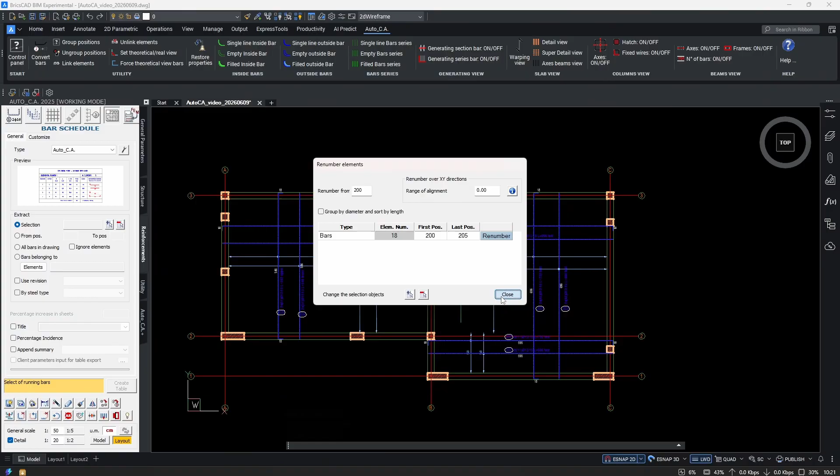And also, if you try to renumber only these bars when they are under grouping, there's going to be something interesting. So let's try to renumber these starting from 200. Renumber, close. Now all the bars changed up to 200 and something, because they are grouped together, even though I selected only these ones for renumbering. So as you can see, from the point you group these bars together, they behave like they are one.

Now we arrived to another feature called element assign. I'll create an element with this button. For that, I need to select some of my bars, press space, and I can see in this dialog that these bars are unassigned right now.

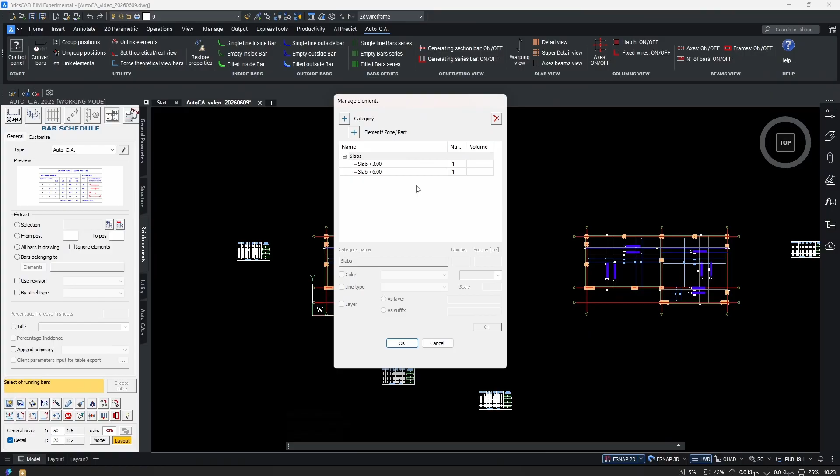So let's go to the Manage tab, create a category. I say slabs, and create an element inside the category. This is slab on the +3.00 level. Let's create another one - click on slabs, create a new element, and this is slab on the +6.00 level. We can close this one.

Now we have our new category with these two elements. This one, the first slab, is the lower one on the +3 meter level, and you can see some tables have already changed. Let's assign these bars to the +6 level, and this table changed as well.

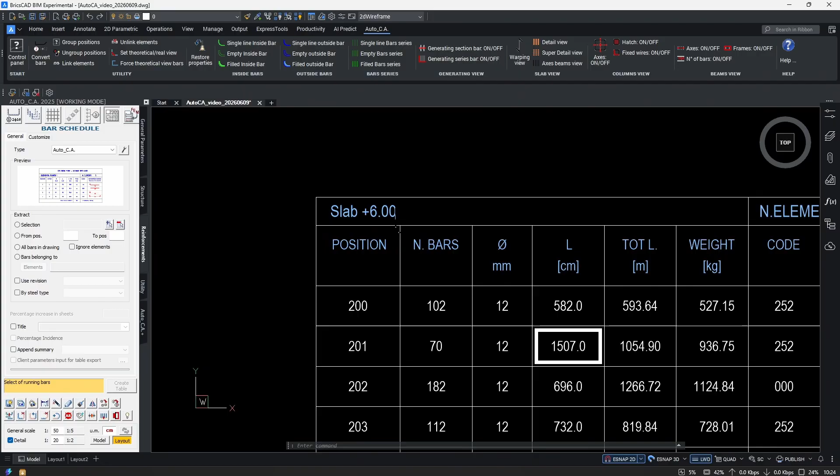What's the difference? The name of the list got enlisted here, so we can see clearly that these bars belong to the +6 level slab. On the list where we included everything, we can see these two slabs separated, so we no longer have unified bar numbers, but instead grouped by element assigned. On the summary, we have these two enlisted as well with their respective total weights, and at the bottom of the list these two values are added together.

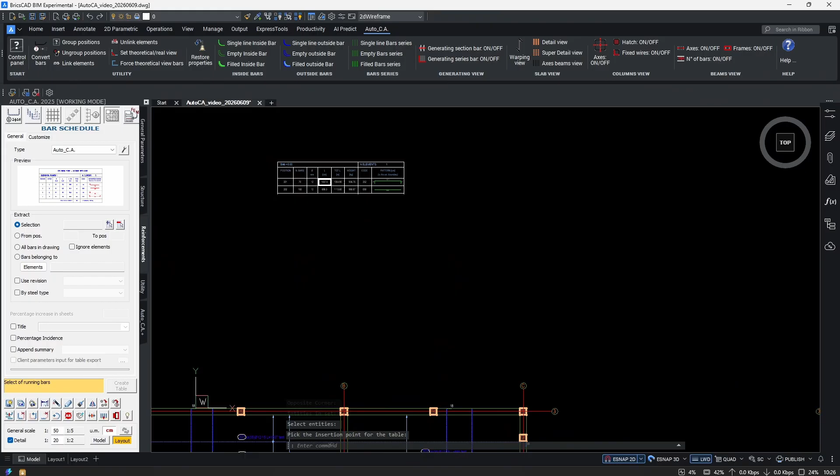Now this element assign feature gives us a lot more options when it comes to bar list generation. So our possibilities are as follows: we can select individual bars like these three and create a bar list of them, or we can create a bar list from all bars in the drawing.

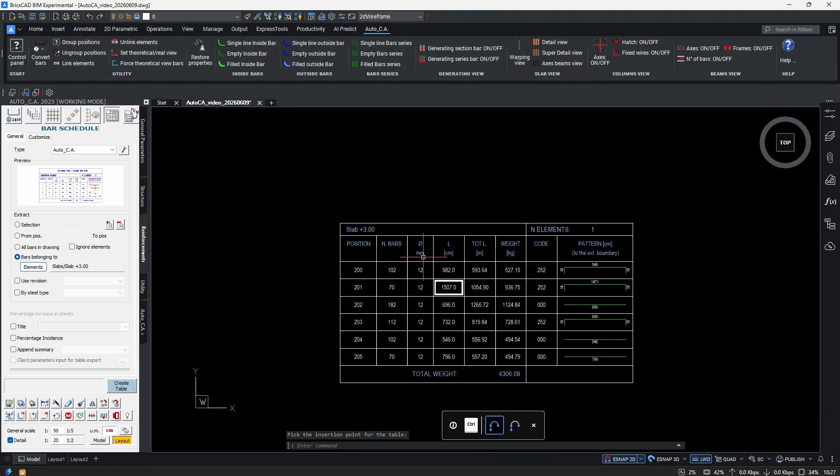We can create a bar schedule from the selected element type, like the first slab from the +3 level, or from the second one, or both of them. And of course we have subcategories to give us more specific filtering by revision or by steel type. So these are our options for bar schedule generation, giving us a lot of flexibility when organizing project documentation.

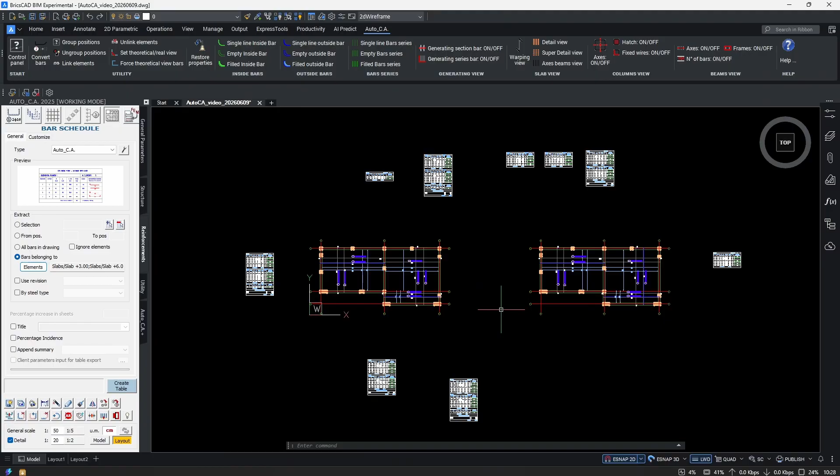As an additional tip, remember that the entire reinforcement assembly remains dynamic. If the formwork changes, we can stretch both the formwork and the reinforcement together. Like if we need to stretch this one - right now it's a block, but let's explode it. If we need to stretch this formwork by 2 meters, 200 centimeters, now we are asked to change all the positions of the number 201. This is because this bar is grouped with this one here, but we only stretched this one.

If we say no, and also no to another bar, no again, no, then we get some new bars with new mark numbers. But if we chose to stretch everything together and stay with the same numbering and change all the positions, then this stretching will apply not only to these bars but to these as well. I don't even have to emphasize how good this is - if the reinforcement adjusts along with the geometry, we can save a tremendous amount of rework if something changes.

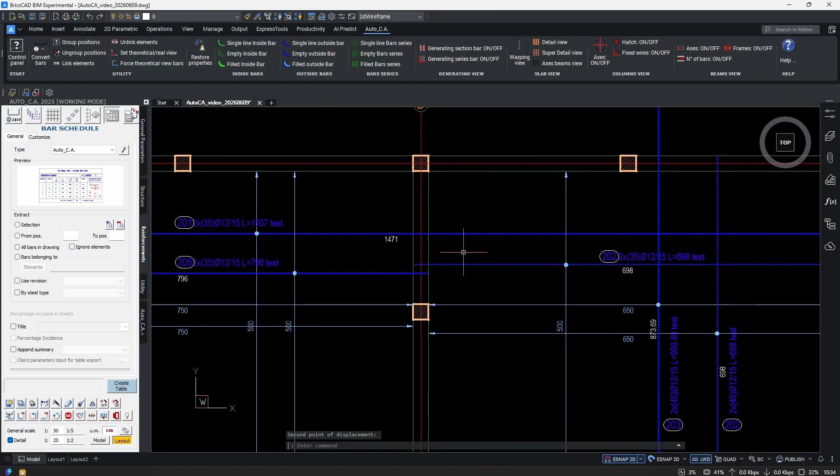I also want you to pay attention that these two bars we made purposely identical. They got the same element numbers, so they work together as one. If I stretch one, the other stretches as well. This is the huge benefit of grouping all the bars we want together. So this is essentially the standard workflow when working with rectangular or parallel reinforcement distributions.

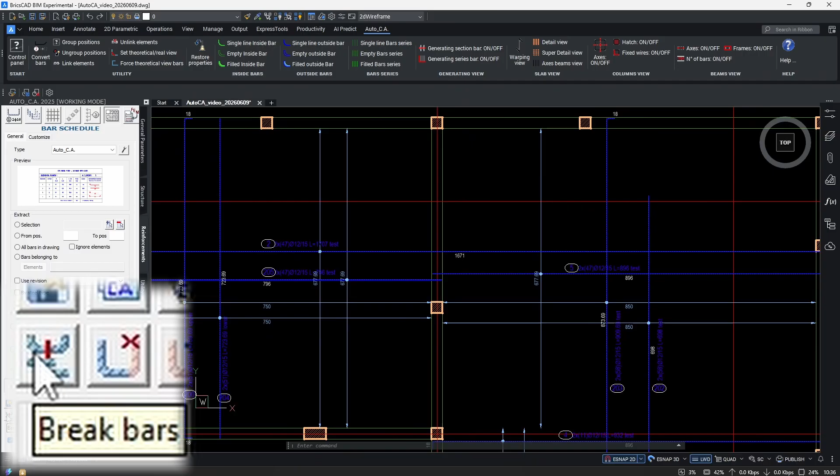Finally, let's look at one more useful feature. We have these bars running continuously from one side of the slab to the other. Once the bar is created, we can use the break bars function, and there are two ways to do this. The first is to manually specify a breakpoint. Right now I will tell the software to break my bar here on the axis line, and now we have two new bars which I can move freely, independent from the other bar.

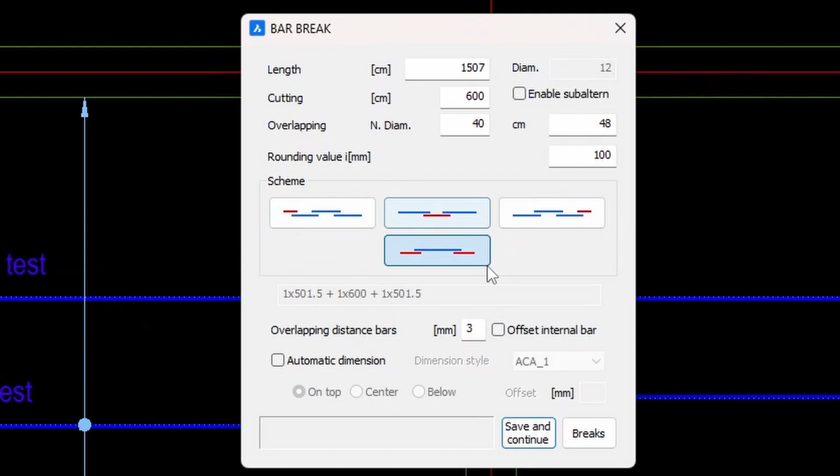The second option for breaking bars is to instruct AutoCA with the options menu to split the reinforcements into predefined lengths. For example, the cutting should now be 600. We can select a scheme for how to cut the bar, and we also get a simplified sketch of what kind of bars we will get from this cutting. If I select this scheme, I'm going to have one piece of 600 centimeters, one piece of 403 centimeters, and another one with the full 600 centimeters. This result changes when you select another scheme. You can also define an overlapping distance, and we can put automatic dimensions onto these new bars.

So let's do that - let's click on break, and now we have 3 bars exactly as described in the dialog: a 600, a 403, and a 600 again. As you can see, this can be extremely useful when dealing with transportation limits, fabrication requirements, or construction constraints.

And with that, we've covered the complete workflow for creating, copying, modifying, grouping, renumbering, and scheduling distributed reinforcement bars in AutoCA.